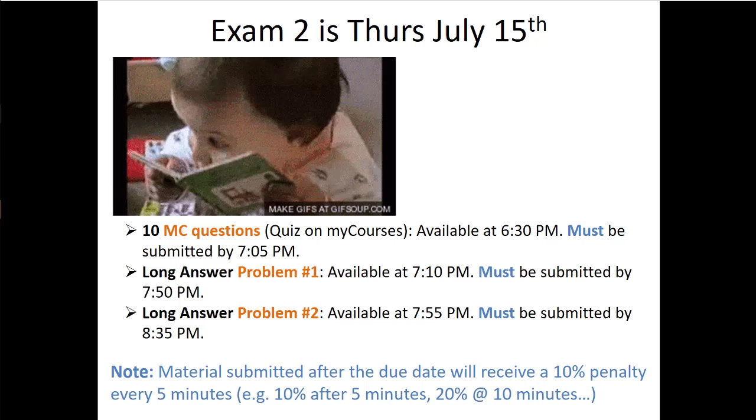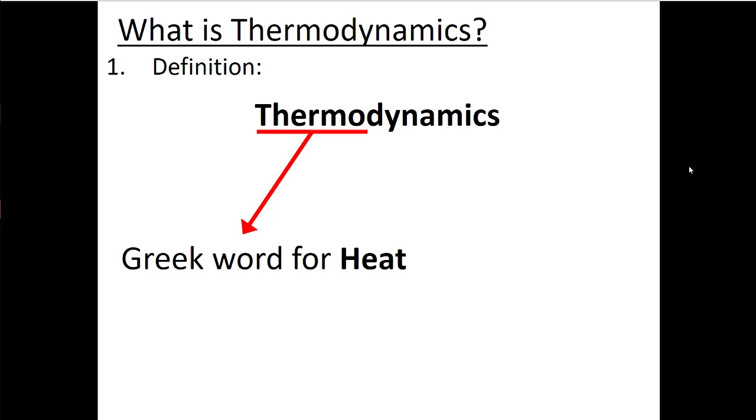Okay, so I want to zoom out a little bit, right? We've been talking about heat engines, right? Now these heat engines are really doing what we call thermodynamics, like literally, right? Because they're taking heat and turning it into work, right? So that's why it's a heat engine. It takes heat and turns it into work.

Now, we've been specifically talking about Rankine cycles, right? So this idea here that you give a mechanical engineer heat, and what we want to do is boil water, because when we boil water, we can run that vapor through a turbine and generate power. Then we have to condense that liquid, pump it back up to pressure, boil it again to get back to the turbine so we can keep generating power. And this kind of runs around and around and around.

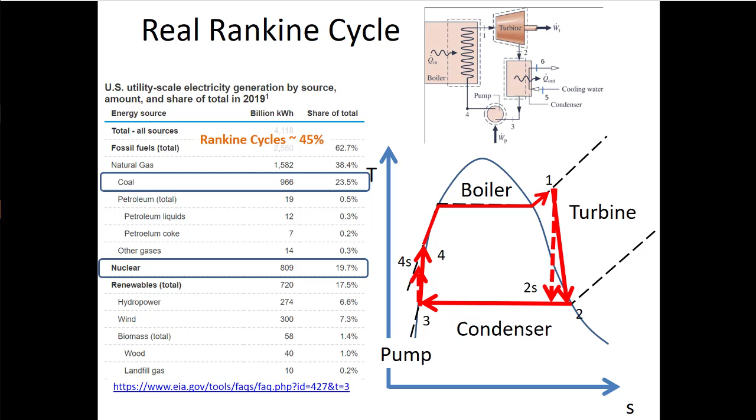And these Rankine cycles are actually pretty important here in the US and presumably across the world, right? Where they still make up approximately 45% of the power that we generate, at least in 2019. What's happened since I started teaching this class is that the reliance on Rankine cycles has come down a little bit in favor of natural gas power plants. And we'll talk a little bit about those too when we start looking at different cycles. But there are some advantages to natural gas power plants, which are sort of on the rise here in the US.

So one of the things that we'll do whenever we talk about these different cycles is we'll think like, how do we characterize the system? That's kind of one of our big questions. How do we see how well the system is doing, right? So the way that we do that for heat engines is we talk about thermal efficiencies.

Now, all of these characterization parameters are going to be the energy benefit divided by the energy cost. But in a heat engine, like a Rankine cycle, the energy benefit is going to be the net power that we produce. And the energy cost is going to be the heat that we have to put in, right? So basically, this thermal efficiency is asking, if we take all that heat that we put in, how much of it can we actually turn into work? Because remember, Kelvin and Planck said we have to reject some heat, and any heat that we reject from the system isn't turned into work, right? Because that's the first law telling us that energy can't be created or destroyed.

We can compare the actual thermal efficiency that we get to the best possible thermal efficiency we could have, right? The Carnot efficiency, right? If I take T hot minus T cold over T hot, or 1 minus T cold over T hot. Remember, at least in the denominator here, and if you turn this into 1 minus T cold over T hot, it's not always temperature differences, right? And any time in an equation you don't have a temperature difference, that means you have to use absolute temperatures, right? And sometimes people will say to me, Dr.

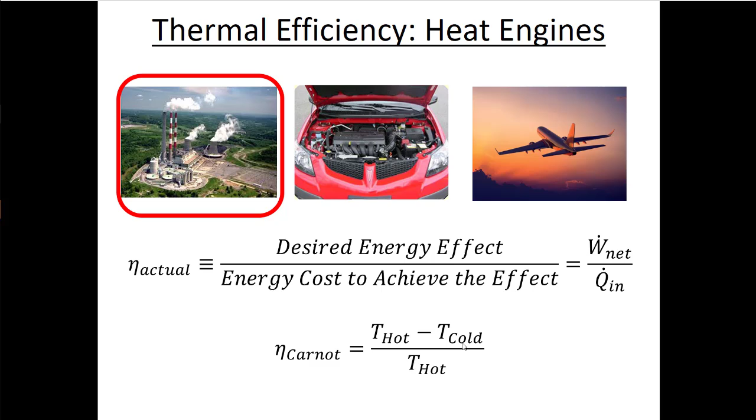But if your hot temperature was 0 degrees Celsius, that doesn't mean that your Carnot efficiency is infinity, because that'd be 273. Your cold temperature would have to be really cold too. So it's not the greatest example, except that it shows that numerically you get a very different answer if you're using absolute temperatures or relative temperatures.

So what we said: when we do these Rankine cycles, we're going to have to look at first law analyses on each of the individual components. And the nice thing is, so far, in this 4-component cycle that we know, that's what we're going to test on the exam, everything is one inlet, one outlet, and steady state. We neglect kinetic and potential energy everywhere.

And then we have to choose. We look at each component. For the turbines and the pumps, we'll say those things are adiabatic, simple systems unless we know otherwise about some kind of heat loss. We'll assume there's no heat loss, so we're just solving for power. In the boiler, it's the opposite. There's no fan blades in there, nothing that's producing or consuming power. So it's passive, doesn't have this power term, and we're just solving for Q dot.

We'll also assume that in all the lines that connect the different components, and as the fluid is moving through the condenser and the boiler or the steam generator, those things have no friction and there's no heat loss to the system. If we do that, we can get these equations, at least for the 4-component system that we know, if the states are labeled in the same way they usually are.

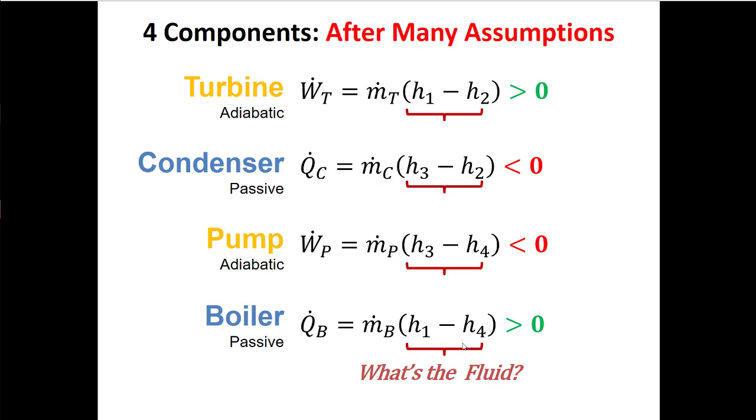Or in the condenser, heat transfer is negative because there we're losing heat. Right, now we did this, and we did a Rankine cycle a couple classes ago. And we found here that our thermal efficiency was 28.4%, which seems kind of depressingly low.

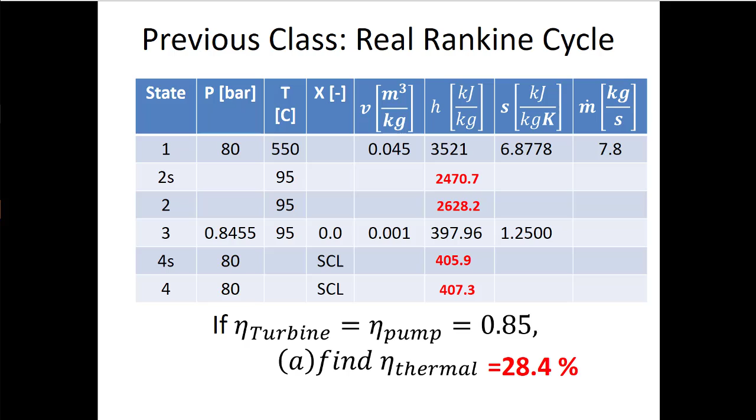So it's basically not even a third of the heat that we put into the system was used to make power. And we pay for that heat, not just economically, but environmentally too. If we're burning coal to make this heat, we'd like to minimize our emissions, or at least reduce them. And here, 28.4%, that's pretty low, but I can't just compare that to 100%. I have to compare that to the Carnot efficiency.

So we did that in a different part of the class, I think, maybe even just part D of the problem. That's something you could be asked to do on the exam. So here, the actual efficiency that we got was 28.4%, but the Carnot efficiency was 55.3%. So even though I can never get this efficiency up to 100%, the highest I can get is 55.3%, but I'm only at about half of that.

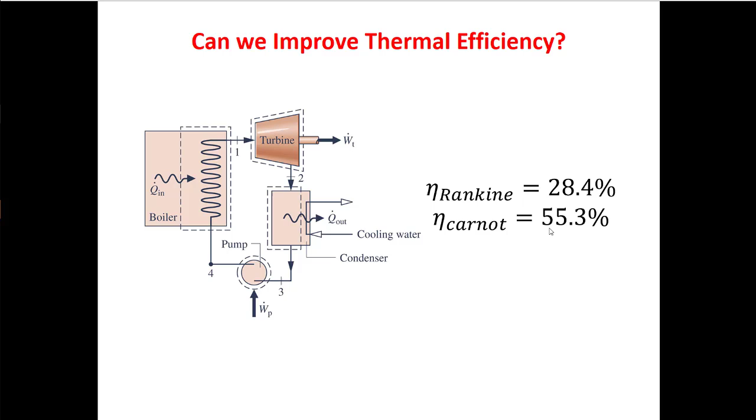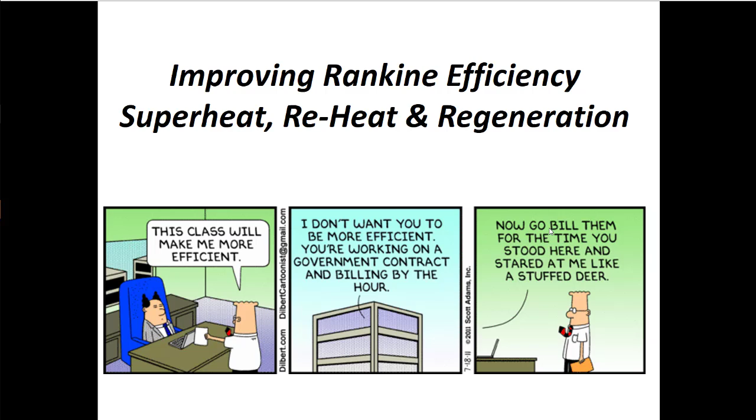So how do I get it better? That's going to be the focus of the class today: how do we take these Rankine cycles and make them better? How do we improve the thermal efficiency so we're either getting the same amount of power with fewer emissions, or keeping the emissions the same but producing more power? Either one of those things is really good, so that's what we're going to try to do.

So why do we want to improve thermal efficiency? This is kind of our role as engineers, because as engineers, I'd like to think that there's a social responsibility involved with being an engineer. If you do your iron ring ceremony here in the US, in Canada we call it a Kipling ceremony. It's done a little bit differently here in the US, but it's modeled after that same system that we have in Canada.

And it really talks about the important responsibilities that we have as engineers, when we're like the representatives for society in a company. So we sort of take that societal role and translate it into business speak. One of the arguments we can make for why thermal efficiency is important is because it means we're going to save a bunch of money. As engineers, you have to know how to talk to your bosses, or to the business people that are running the company you're working for. And the numbers they pay the most attention to are probably the numbers that have dollar signs in front of them.

So if I'm running a coal power plant and I say we can reduce the amount of heat that we're putting in by 1%, then that means we have to buy a lot less coal. So our costs go down, and then our profit goes up, because profit is revenue minus cost. Or maybe our costs stay the same, but we produce more power, which means our revenue goes up. So again, profit, which is revenue minus cost, goes up. We have to be able to speak that language.

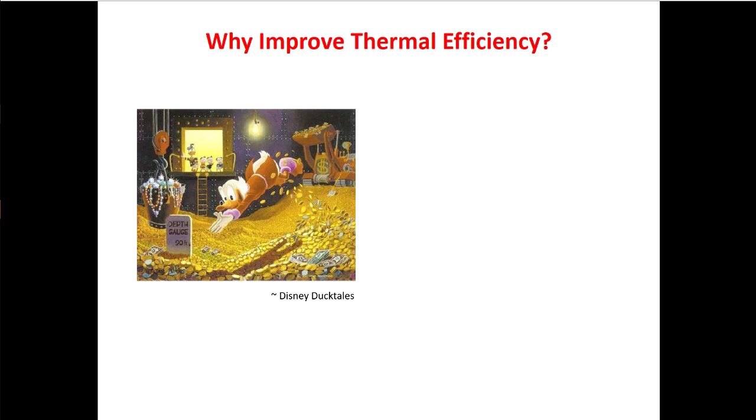But the other thing that we've got to look out for, the other argument we can make for improving thermal efficiency, is that Earth's a pretty good place to live, right? In fact, there's nowhere else in the universe I'd rather live than on Earth. So we do have a responsibility, as drivers of technological change, to try our best to minimize the environmental impact of the things that we're doing. So the other argument here is that as we're improving thermal efficiency, we're reducing our environmental footprint. So there's two different ways to look at this, and they're both good. This is one of those win-win situations.

So this is the kind of argument that I think is good to be able to make, especially if you can justify the profit part. Because my experience isn't vast, but in my experience, it seems to me that the environmental changes that tend to resonate, that tend to be successful with people, are the ones that also have economic benefit. So, if you can improve the insulation in your house and that reduces your heating bill by enough to justify the initial cost, then people do that kind of thing.

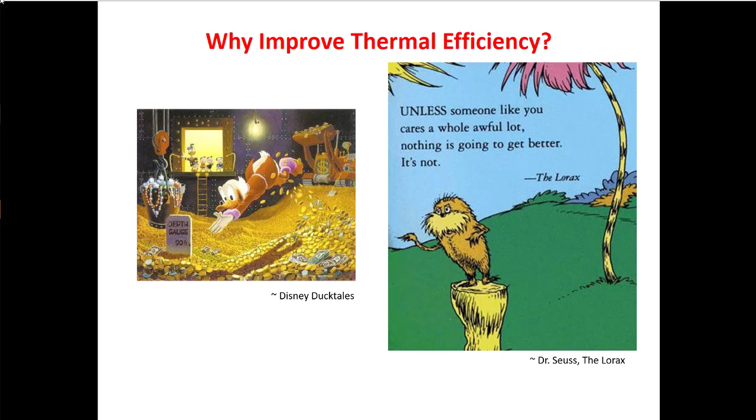So one of the nice things that I've been saying is that sometimes we'll make different models. And as we make these models of the universe, we make assumptions. And as we make assumptions, we're coming more and more away from reality and towards this cartoon level of an understanding of the universe. And this Carnot efficiency equation is one of these models. It's very simple because we made a ton of assumptions. We know that we can't actually get an ideal engine. But the nice thing is we get this very simple mathematical equation. And from this, we can see two ways where we should be able to improve the efficiency of the system. So it's a simple model.

It gives us a simple equation. But from that simple equation, we can say, well, we want to get closer to 1, that's 100% efficiency. And really, I only have 2 levers here. If I look at this equation, there are 2 variables I can change to get closer to 1. I want to minimize this negative term. And if you look at this, you can probably tell me what those 2 things are. So the first thing is I can increase the hot temperature of my cycle. If I do that, then this fraction gets smaller because the denominator gets bigger. If I could increase this T hot to infinity, then my Carnot efficiency would be 1 or 100%.

The other thing that this equation suggests that I could do to at least improve the efficiency of the ideal system, maybe that puts me on the right track, is decrease T cold. If my T cold was absolute 0, then I'd have 1 minus 0 over who cares what T hot is, because it's still 0, and that would be 100%. Now, that's not practically possible because you'd probably be spending more resources to get to that absolute 0 temperature, which we can't actually get to.

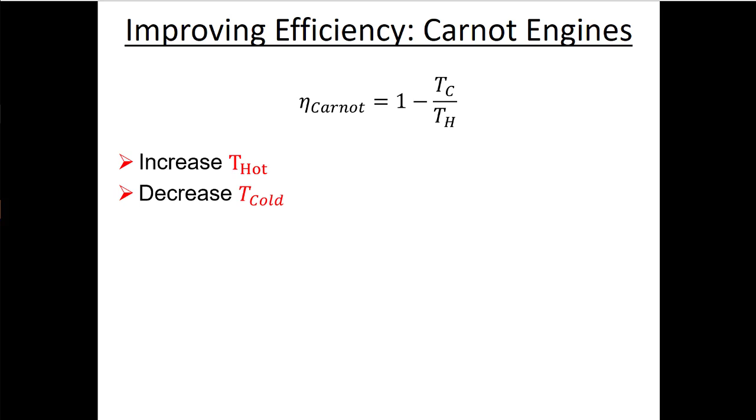Although my understanding, it's not my area of research, is that we're getting very close to absolute zero, but I don't think we've ever really hit it, right? But those are the two things that we can do, right? So here, the first thing that I'm going to look at is how do we increase T hot?

So maybe the very first steam engines would boil water, and maybe they'd get to the point where they have saturated vapor, right? So how do I get my temperature higher? Right here on this TS diagram, what I want to do is increase my hot temperature. That's the temperature my heat is coming from, because, remember what I called the zeroth law of thermodynamics, or maybe what my old professor called the zeroth law, is this idea that heat only goes from hot places to cold places.

on the surface, you might say, well, that's bad because we're using more heat, right? And that means we're potentially burning more coal, or maybe we have a different fuel source that generates a higher temperature. But I am increasing the work out, right? So when we think about thermal efficiency as net work divided by heat in, really what we want to be doing is increasing the net work faster than we increase the heat in, right? And that's essentially what we're doing when we superheat the fluid. So when we get the inlet of our turbine up into this superheated region, then we increase the thermal efficiency.

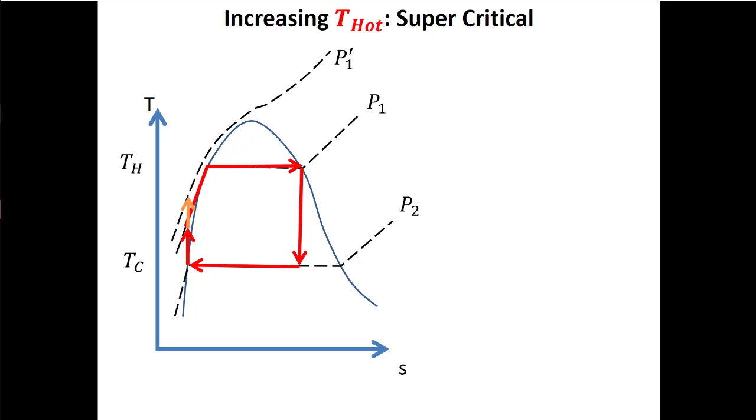What's another way that we can increase the temperature? So we can go supercritical, right? And this sounds maybe more exciting than it is. But remember, the line for the critical pressure would be this constant pressure line that would come and just kiss the top of the vapor dome, right? And the critical temperature associated with that would be a horizontal line that, again, is just kissing the top of the vapor dome here. But if we can push that, if we can get to a higher pressure and add heat, then we can skip the vapor dome entirely, and we end up here, right? So this would be a supercritical Rankine cycle.

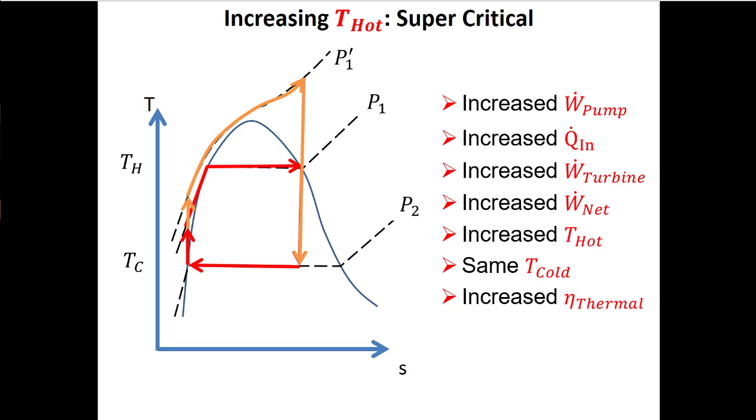So, we do increase the pump work, but we know in Rankine cycles, pump work's not that important. That's kind of the reason that we condense the fluid: it takes very little power to increase the pressure of a liquid, at least relative to the power we're going to end up generating because of the turbine, right? We do need to increase the heat in, but we increase the turbine power such that the net work is increasing faster than the heat transfer rate in. So again, using a supercritical Rankine cycle is another way that we can increase the hot temperature and increase our thermal efficiency.

Now, why don't we just increase the temperature to infinity, right? And beyond, as they'd say in Toy Story, Buzz Lightyear, I was trying to remember the name. But there are practical limitations. There are always practical limitations. That's kind of our job as engineers, is to figure out first physically what changing different knobs or levers is going to do, and then try to work within the real limitations of an actual process to make it work better. Oftentimes, as I've said before, without having a perfect understanding of how the universe or the physical behavior of our system works. So we've got to try to make things better without that perfect understanding.

So we can only transfer heat into our working fluid from something that's hotter than our working fluid is. Right. So maybe we're working with chemical engineers making better fuels that burn hotter, right? My understanding is that jet fuel burns hotter than gasoline, even though they ultimately come from the same place. A chemical engineer probably knows a lot more about that than me, but that's my understanding. The other thing that could happen is that we're dealing with material properties, right?

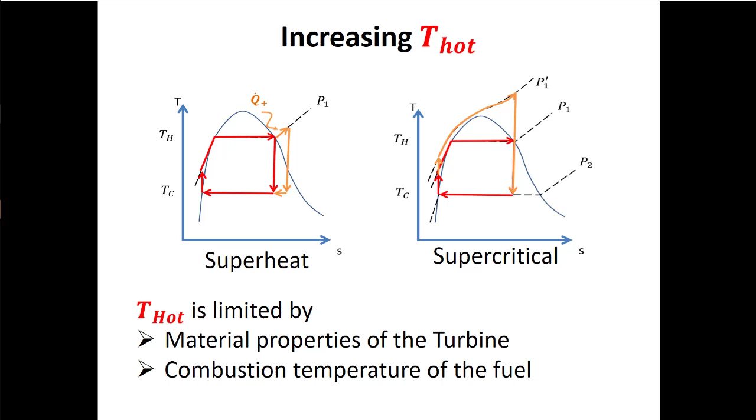So there are different limitations, but generally, if we can increase T hot, we can improve our thermal efficiency. So what's something else we can do? We can reduce T cold, right? Because that thermal efficiency, at least for the Carnot version, is 1 minus T cold over T hot. So if I can reduce the cold temperature, or the temperature that I'm rejecting heat to, then I can improve my thermal efficiency. So oftentimes in these Rankine cycles, we'll actually drop the pressure quite low in the condenser, often much less than atmospheric pressure. Right? So now my turbine line comes down over here and then across.

And then we're rejecting heat to some thermal or heat sink, right? So we talked about this, how you can potentially do this, rejecting heat to lake water that you're pulling out of a large body of water, something like Lake Ontario. It has to be a reservoir. We have this term in thermal fluids called a reservoir. That means the lake is really big. So even though I'm dumping heat into it, I'm not actually changing the average temperature of the lake because it's so big. Its thermal mass is so large, right? So you couldn't necessarily do this on a small lake, but Lake Ontario is pretty big. We're quite lucky, quite blessed to be so close to so much fresh water here in upstate New York, or where I used to be in southwestern Ontario.

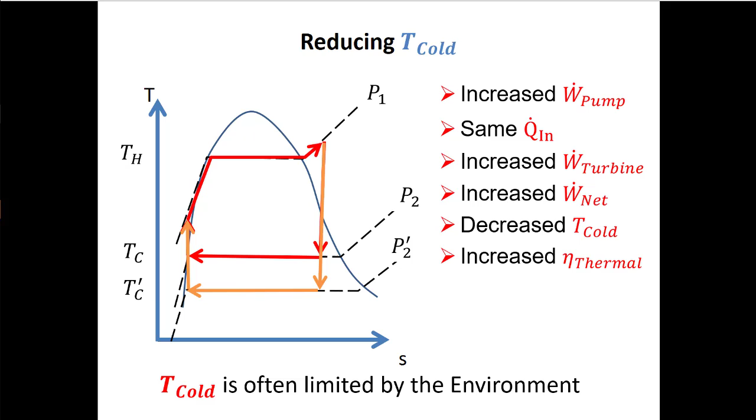Right. So again, if we do this, we're increasing the pump power, but we've seen that pump power is not that big. And what's happening is we're increasing the power faster than we're increasing the heat transfer that goes in, and that improves our thermal efficiency. So those are the two things that we get from looking at our thermal efficiency equation, if we're using the Carnot equation. But the normal equation is going to be net power divided by heat transfer in, right?

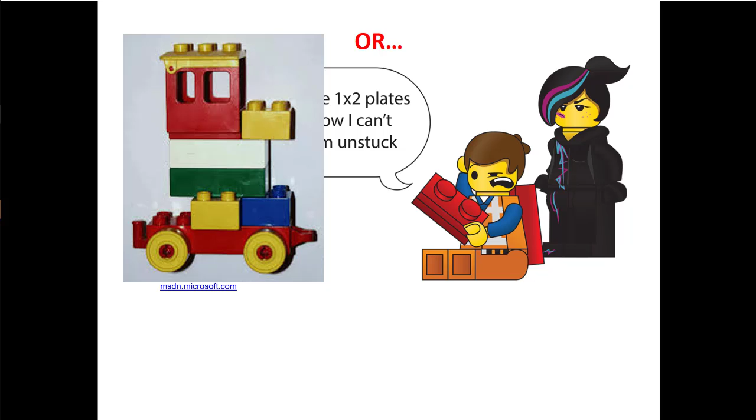I've been going on and on about the Lego thing, which maybe is getting too much. But we've been talking about how these processes are like Lego blocks and we're putting them together in cool ways, right? And what we're going to test on the second exam is kind of a simplistic version of what a Rankine cycle might be. So it's kind of like the Duplo version of what Rankine cycles are. But by the time we're done next week, the stuff that we'll be looking at on the final exam gets away from just using 4 components. And what happens is we increase complexity. So we become these kind of master builders that start to use all these different techniques, increasing the complexity of the system to improve the thermal efficiency.

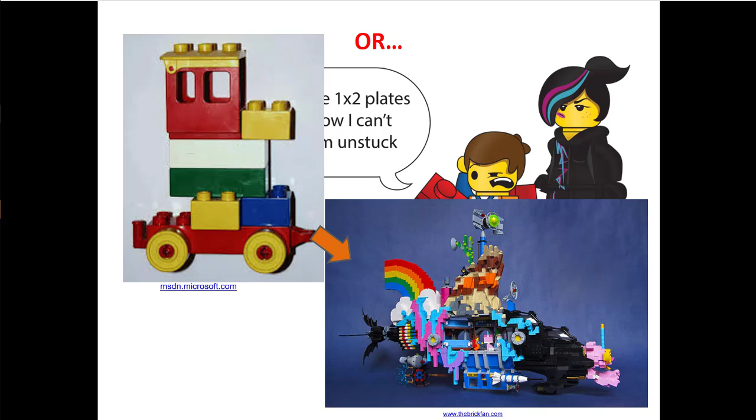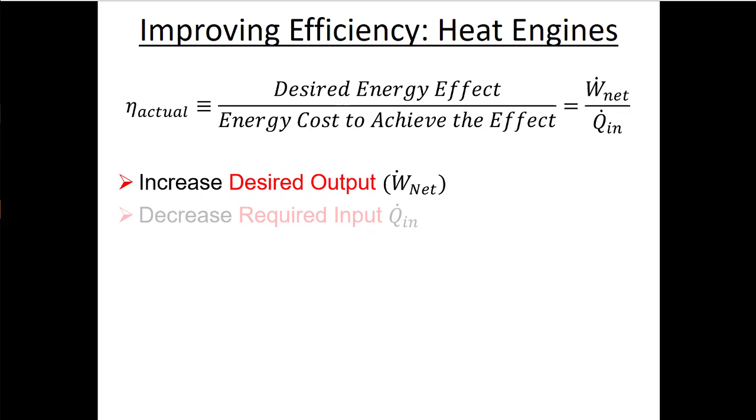And we're going to talk about the first strategy for doing that today. So we're going to talk about what we call a reheat. If we look at the expression for thermal efficiency, not ideal thermal efficiency, but just thermal efficiency, it's net power divided by the heat transfer rate in. So I can look at this equation and see, well, if I could increase my net power and not increase my heat transfer in, then I would improve thermal efficiency. Or if I could decrease the amount of heat that I put in and keep the net power the same, then that would also increase thermal efficiency.

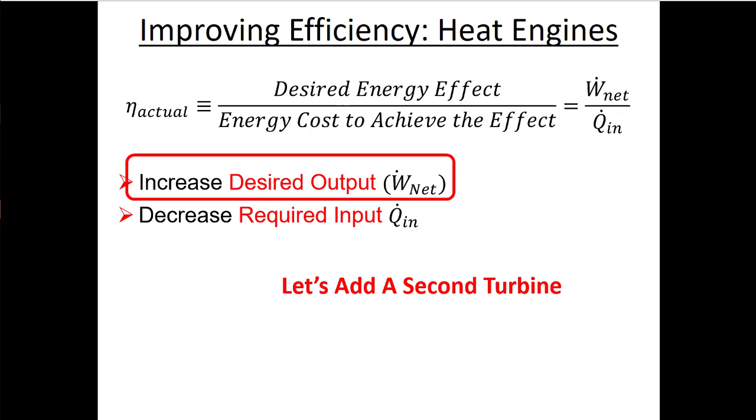So it's true that both strategies for increasing the complexity are changing power and heat transfer, and they're both increasing the power more than they're increasing the heat transfer rate. So the thermal efficiency goes up. But I like to think about this first strategy, which we'll call reheat, more as increasing the net power. So it looks at this Rankine cycle and says, well, if one turbine is good, maybe two turbines are better. So let's try it out.

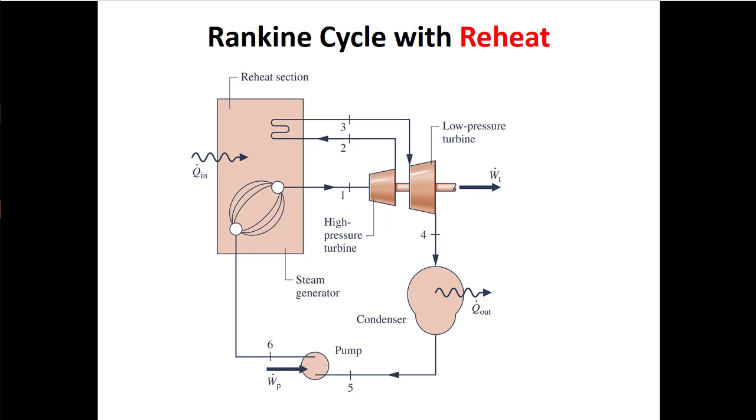So what we do here is we've increased the complexity by adding more processes. There are 2 processes that we've added here. One is a second turbine. So we have what's called a high pressure turbine, because the fluid comes into this turbine at high pressure. And what happens in the turbine is the pressure goes down, as we're taking the enthalpy from the fluid and turning it into mechanical work, or power. And then we're going to go through this second heating phase. That's the other thing that we're going to add. And then we go through this low pressure turbine. So we won't get as much power out of the second turbine, but we go back into the boiler and we produce more power than we otherwise would have.

Now, it does come at the cost of adding more heat to the system, but the way that I think about it is, we've already got this boiler over here. It's already at some very high temperature. Let's just run the lines back through here. So there's more heat going into the fluid. But I imagine the physical complexity here is not like we have to build a whole new boiler. It's probably not a trivial thing to put more tubing in here and a better heat exchanger or whatever, but it's not like the boiler's not already there. So in between these two turbines, if we didn't go back into the boiler, it wouldn't really be too much different.

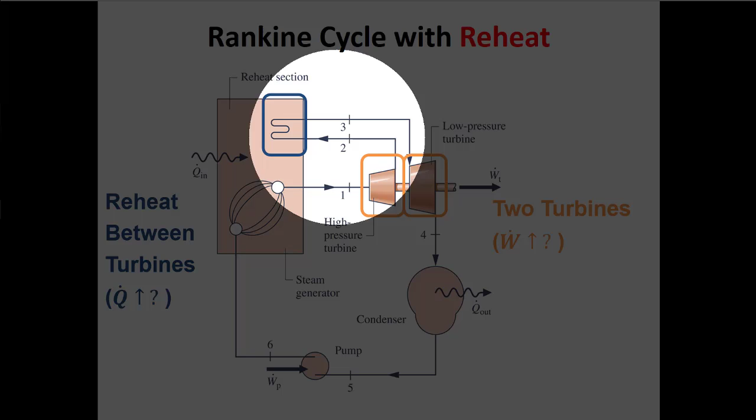But because we're reheating the fluid, we're adding more enthalpy to the fluid from state 2 to state 3, which means that there's more enthalpy to take out in my second turbine. Now the rest of the cycle looks the same. It's a condenser and then a pump and then a steam generator or a boiler. So I think of this as adding more work because we put in another turbine, but we're also increasing the heat that we put in. But again, because the thermal efficiency goes up, it means we're increasing the power more than we're increasing the heat transfer rate.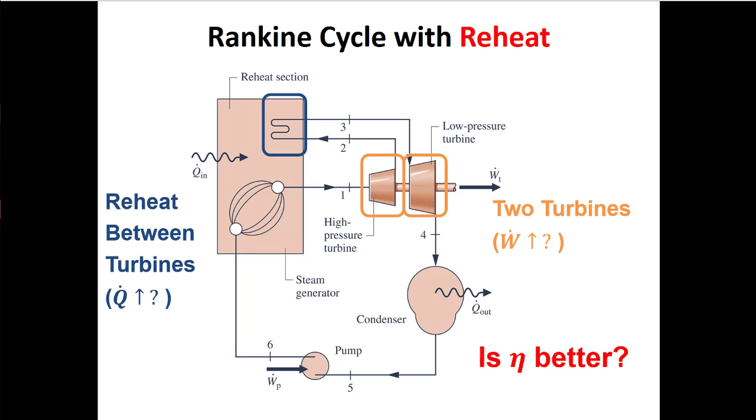All right, so here we're going to ask the question, is the thermal efficiency better? Or maybe, how can I find the thermal efficiency? I don't think it's a big spoiler here to say that we wouldn't be teaching this to you if it didn't improve the thermal efficiency. So, at the risk of spoiling the punchline here, yeah, efficiency gets better.

So the first thing I want to do is talk about the TS diagram. In the 4-component Rankine cycle that we'll test you on in a week's time, it's got 2 pressures, a high pressure and a low pressure, and 1 turbine. So here we take that turbine away and we're going to put 2 turbines. But that means we need some intermediate pressure, a pressure that's in between the high and the low pressure that we see in the system. And that first turbine, the high pressure turbine, goes from the high pressure to the intermediate pressure.

So I'm showing that as coming out something like a saturated vapor. Then we add, so that's the first turbine, right? The high pressure turbine. What happens next is we go back into that other heater, right? So we do reheat, right? And because we're adding more heat, we stay at that same intermediate pressure. We assume there's no pressure losses in the system here while we're adding heat, but the temperature goes up, right? So it looks like this on my TS diagram.

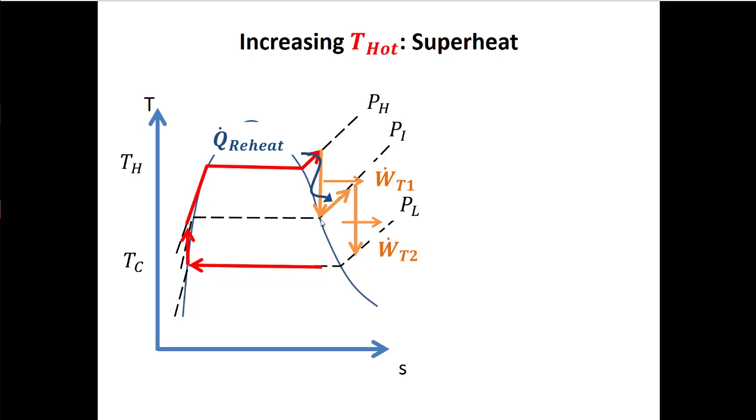And then I go through the second turbine, and that second turbine produces me some more power. And then I have a little more condensing to do, which means that I'm rejecting more heat. And Kelvin and Planck say, yeah, of course you have to reject heat. So when I do this, I do increase the heat transfer in, which on its own looks like maybe that wouldn't be that good. But because I generate more power, the increase in the power is bigger than the increase in the heat transfer rate. So what happens is we get a better thermal efficiency. The textbook talks about this as increasing the average temperature of heat addition too. So that's another way that you can see that maybe your thermal efficiency is increasing.

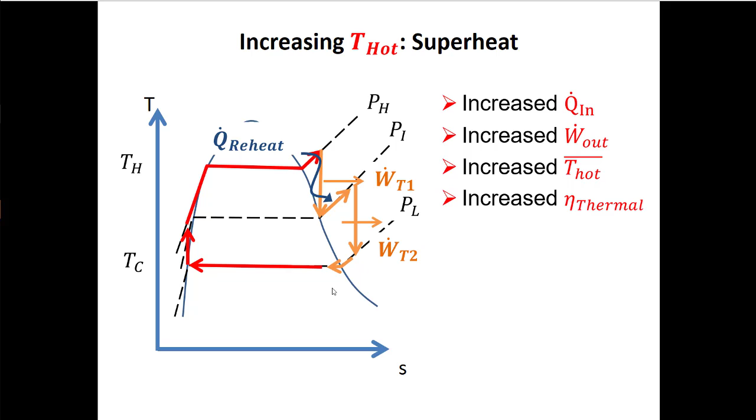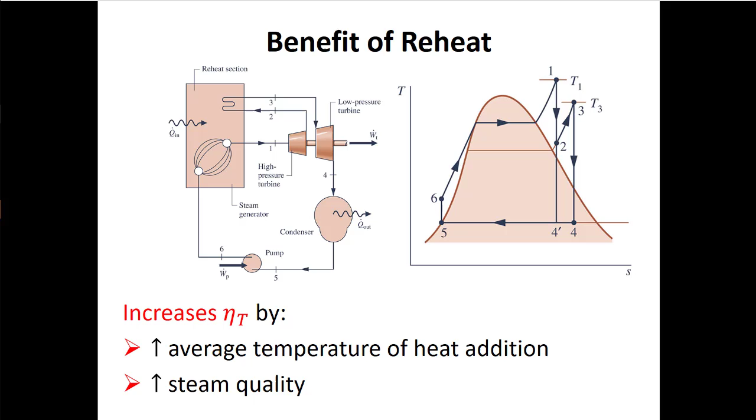So how do we go about analyzing a cycle like this? The first thing that you might see on a final exam that has reheat in it is you'd have to draw a TS diagram like this. But then the next thing is, well, how do I characterize the system? Again, the benefit of reheat is that we're increasing this average temperature of heat addition. We get better steam quality as we're going through. So we're not going through the turbine here from 1 to 4 prime. That's how we used to do it. But now we're going to go through this second turbine over here and we're cutting through the vapor dome less. So that generally means our turbines are doing better, so they'll produce more power.

So thermal efficiency is the same equation that it always is if you look at the base level, which I'm always going to encourage you to do. The definition of thermal efficiency, of all these characterization parameters, is benefit over cost. The benefit of thermal efficiency is net power, and the cost is heat transfer rate in. Now it's a little more complicated because there's more processes to talk about. So we've got to pick the right process. First we'll look at where in this system power is important. I have turbine 1, turbine 2, and a pump. Before, in the 4-component cycle, I only had a turbine and a pump. Now I have 2 turbines and a pump, but that's okay.

My first law analysis is ultimately going to be about the same. I'm going to say it's at steady state, these things have 1 inlet and 1 outlet, I'm going to neglect kinetic and potential energy, and I'm going to say that they're adiabatic. If I do all of those things, then I'm going to get the equations that I'm used to. But even before I do that, I can break down net power, which used to only be, going from the first law, turbine power plus pump power, recognizing that the turbine power is positive and the pump power is negative. That's why I've got the color coding here. But now it's the sum of all the turbine powers plus the sum of all the pump powers, even though there's still only one pump. There's a general way that we can look at that and say, add up all the turbine and pump powers, recognizing again that we're adding negative numbers when we're talking about the pumps.

For the heat transfer rate in, it's kind of silly because this thing is called reheat. But for me, if I'm going to make a mistake, I usually remember that there's two turbines to analyze. Sometimes if I'm doing these problems quickly, I'll forget that there's two places where I'm adding heat. So I've got to remind myself, hey, Mike, this thing's called a reheat cycle. That means that there's two times we're adding heat. So here, there's two terms in the denominator as well. They're both positive because they're both about heat addition. We're looking at adding heat in the boiler the first time and the second time, or sometimes I'll say Q dot B for the first one is boiler and Q dot RH, reheat, for the second heat transfer phase in here.

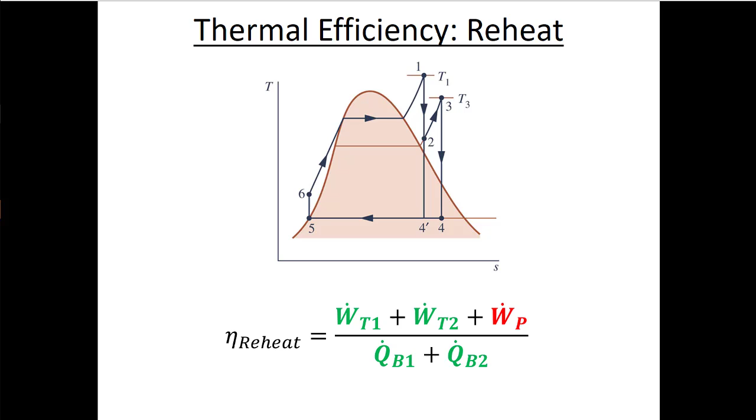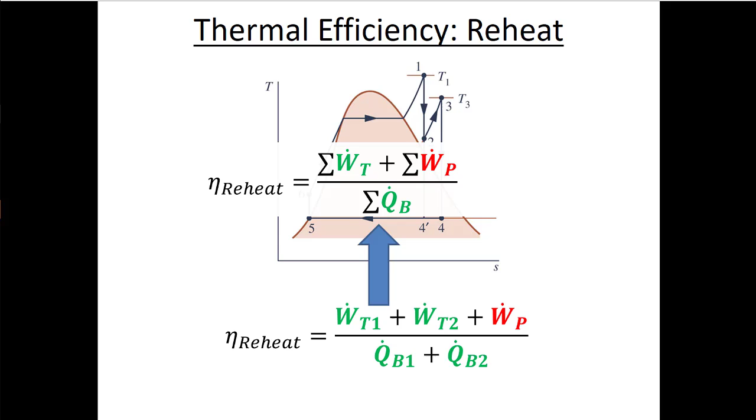So if I write out my thermal efficiency, I can say it's going to be the power from turbine 1, positive, plus the power of turbine 2, positive, plus the power of the pump, negative, divided by the heat transfer in the two places where I'm adding heat. Or generally for any cycle where we're talking about a heat engine, at least if it's an open cycle, or a series of open systems, then the thermal efficiency will be the sum of the turbine powers, which are positive, plus the sum of the pump powers, which are negative, divided by the sum of all those places where I'm adding heat to the system. That's the general open system version of thermal efficiency.

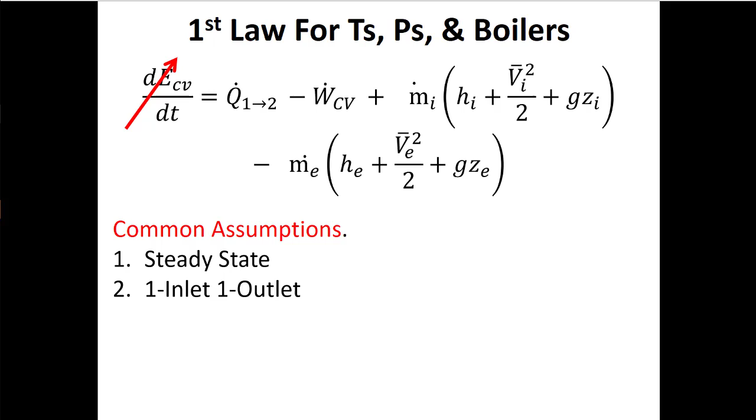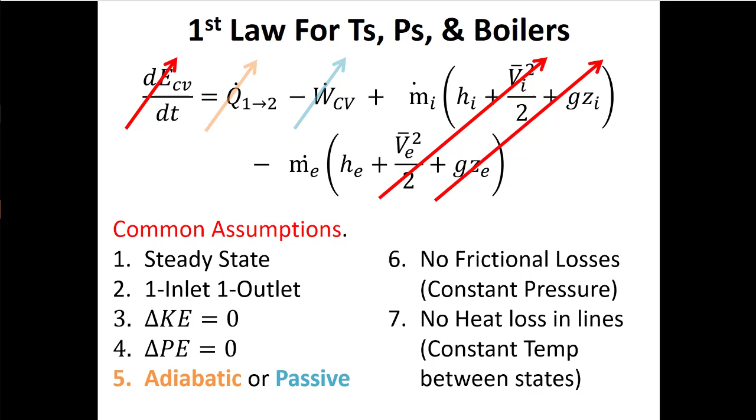Right now, I'm going to look at each one of these components, just like I did with the 4-component cycle. I'm going to say they're all at steady state. In this case, they're still all one inlet and one outlet. A little bit of foreshadow there. We're going to neglect kinetic and potential energy changes. For the turbines and the pumps, I'm going to call them adiabatic and isolate for W dot. For the heat transfer places, like the boiler and the reheat, I'm going to say that they're passive and isolate for Q dot. Again, I'm going to assume no frictional losses anywhere, and I'm going to neglect heat losses in the lines that connect our different components. If I do that, I'm left with the equations that I'm used to.

The turbine powers are m dot times H in minus H out. They're positive. The pump powers are going to be m dot times H in minus H out. They're negative. The condenser, which we didn't really talk about too much here, but if I'm just looking for how much heat is rejected, I can get m dot times H out minus H in. That's negative because heat's going out. And if I look at the boiler, the place where I'm adding heat, that's going to be m dot times H out minus H in, in the different places where I'm adding heat. Here I've just generically said H in minus H out, because then this works for any of the turbines and any of the pumps.

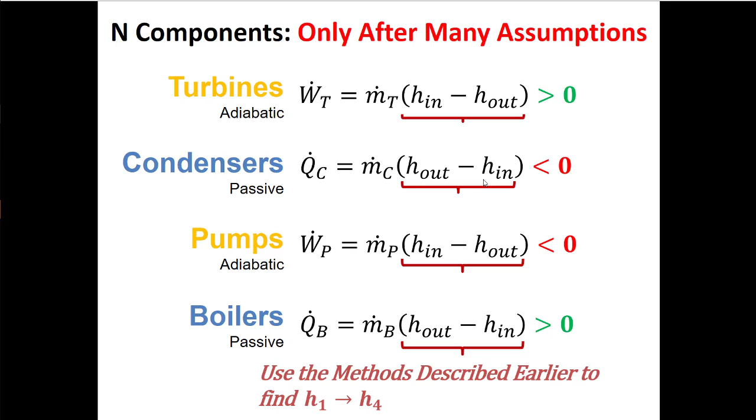Sorry about that. Then my condenser. If I was looking for how much heat was getting rejected from this condenser, this would be m dot times H out, which is H5, minus H4, which is H in. So we expect that to be negative because we're rejecting heat. The turbine powers were positive. The pump, there's only one pump in this system. It's going to be m dot times h in, that's h5, minus h out, h6. And pump powers are supposed to be negative.

The boilers, and again, if I'm going to mess one up, it's that I forget to put the second boiler in, or the reheat phase. This is m dot times h out minus h in, or h1 minus h6. And this other one is m dot times h out, h3, minus h in, h2. And so that's how I go from this general process to specifically what's going on in this cycle. This is what I want us to think about when we're doing all of these. So from here on out, it's all cycle analysis.